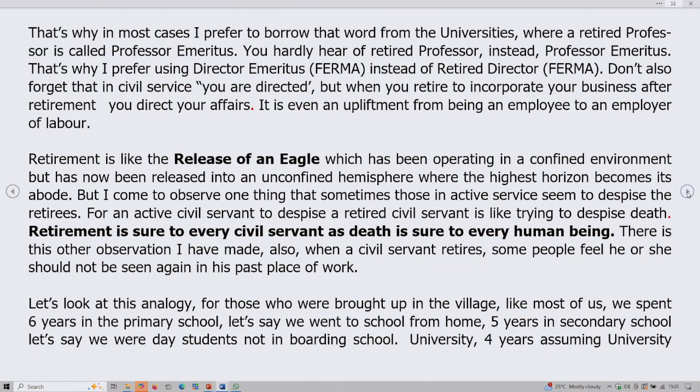The other observation I've made is that when a civil servant retires, some people feel he or she should not be seen again in his place of work. Let's look at this analogy. For those who were brought up in the village, just like me, we spent 6 years in primary school, spent another 5 years in secondary school. Let's say you had a university in your own town, 4 years.

That is, it means that you spent a maximum of 15 years in the village. In the civil service, we spent 35 years, like I spent, in our places of work. I therefore conclude, if somebody cannot stop me from going to my village, where I spent only 15 years, when I retired, nobody should stop me from going to my place of work, unless such a person was not treating his subordinates fairly.

Let me also sound a note of warning here. Never retire to the village if, when in service, you were not close to those in the village. The result will be that of living in seclusion, loneliness, social alienation. And these are the root causes of depression and terminal disease, leading to early death of most retirees. Does it make sense?

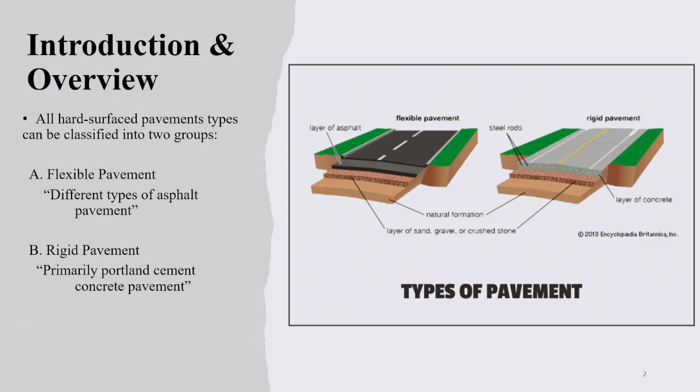So as we all know, our pavement is either flexible or rigid. Flexible is more or less asphalt concrete, binder or bituminous material, and rigid primarily is Portland cement. Now we are using RCC. And I'm not sure if you have heard about what the Italians are trying to do. It's good to mention, since we're talking about new materials, they're doing what they call self-cleaning roads.

Self-cleaning or photocatalytic roads. Basically, some materials have the tendency to eat up dirt; it decomposes dirt in the presence of sunlight. We all studied in primary school that there is photosynthesis, like green chlorophyll. When you give carbon dioxide and sun rays, you have oxygen. So there are some materials that do the same, but instead of changing carbon dioxide to oxygen, they eat up the dirt.

I mean, it's the dominant cement company on earth. It's Italcementi. It's Italia, like Italy, Cementi, like cement. So they already have prepackaged Portland cement with incorporated photocatalytic components. There are lots. I personally did some research using titanium dioxide, micro to nano size. Nano will be expensive, but on a practical level, micro titanium is not that expensive at all. And if you incorporate it in rigid pavement, especially on the top 1 inch, that's more than enough.

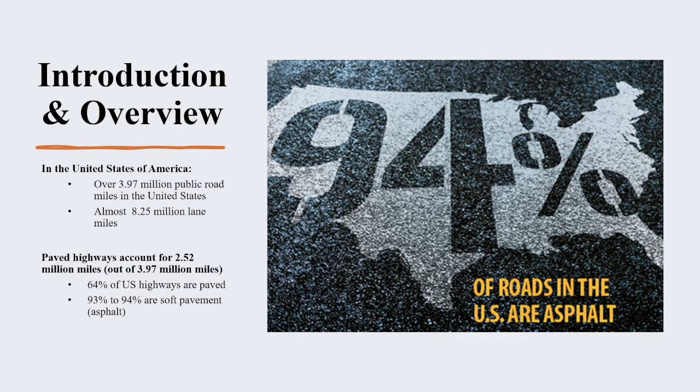Okay? So close to 4 million public road miles, or 8.25 million lane miles in the US. The paved accounts for 64%, and out of the 64%, 93 to 94, I think this is about a year or two ago. Now we're talking 92 to 93. I think 93 is a more fair number, are soft pavement or asphalt. That includes all the types. Hot mix, well, I wouldn't say cold mix, but warm mix and hot mix.

We've seen there is dense graded, there is open graded or gap graded, there is porous. It depends on the function. Do you need it mainly for drainage? Do you need it mainly for fighting ruts, etc.? But hot mix and warm mix together add up to 93. Rigid pavement, including Portland cement plus RCC,

is accounting for about 7%. The self-cleaning came to the US; they used it in one state, the state of Missouri, and it's like a pilot project, so it does not represent any percentage. It's just more under exploration right now. But who knows, maybe in 5 years, the pace is getting so fast, it becomes the norm in rigid pavement as well.

Driving, 3.2 trillion miles. The amount of losses is 130 billion dollars. Again, why these losses? When you remember the life cycle cost, the cost at any point is not only the cost of construction, not only the cost of equipment, not only the cost of material. You have to consider the user's cost, the commuter's cost.

This cost includes the regular expenditure, gas, oil change, regular maintenance, or it could be the cost when you have a detour or a blockage or capacity restriction: a 4-lane road, you cut it down to 2 and you are maintaining 2, then that congestion results in more gas consumption, time loss, and time equals money. So all this has to be accounted for.

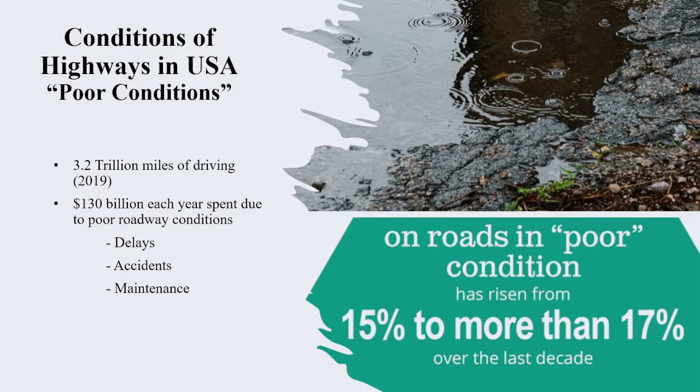Also the accidents evolving from poor conditions, especially ruts mainly. I wouldn't say a regular crack or raveling would do, but accidents account whether you have a mechanical problem or damage to the equipment, which is your vehicle, or human injury, that's another cost, or death, God forbid, which is the maximum cost incurred.

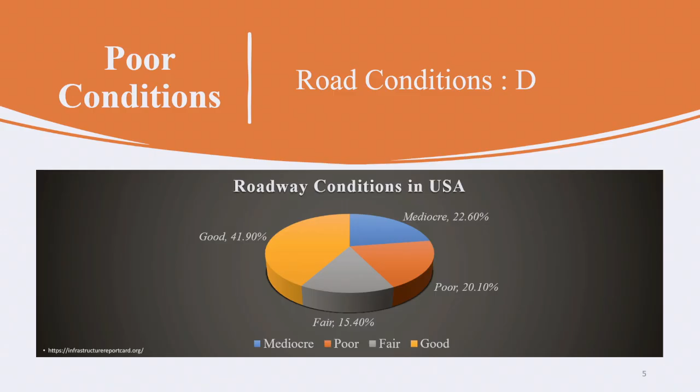I mentioned this before, and this is a better looking pie chart. Only 42% looks good; 58% are not in good condition. Remember, our overall grade is a D. If you go to the first presentation, D means it's failing or about failing. So it's really in poor condition. C is mediocre. F is clearly failing, that needs a full or new project. It's not worth maintaining, just replace. So it is disastrous. The amount of money available is covering only 60% of the needs.

Another thing for the quality of the highways is the smoothness. If you remember the drainage, if you calculate the drainage, is anybody interested in hydraulics? So what's the Manning coefficient? Or what's the flow rate?

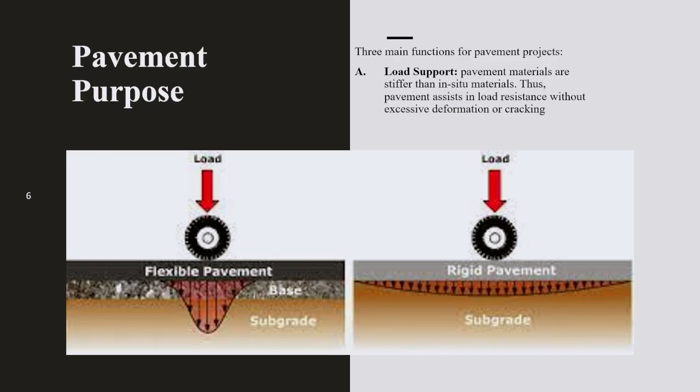So from that point, they developed the reverse or the inverted. I think the terminology they used is inverted. I have to check it. It's kind of new, but I have how the section goes. So basically what they are doing is strengthening that base course, making it much stronger than the surface. Sometimes they add binder to this, believe it or not, mix it like FDR. But most of the time they do strong stabilization. And soil stabilization depends on the nature of the soil. If you have soil that tends to be sandy, what do you think you're going to do? They do cement-based stabilization. If it is silt and clay, they do lime stabilization.

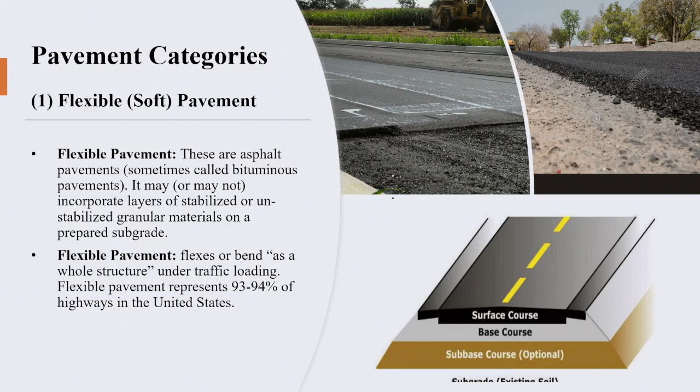So you end up with your base course almost like a beam, as if you are having a layer of semi-rigid pavement, but it's not rigid. And on top of it is your flexible pavement. This way, when the load is transferred, this bottom one is super strong, so you're not afraid of the rutting. And the top one has the ability to, yes, flex. So this is one of the developments on the asphalt they are doing.

Now, categories for rigid. I know you're not using it. I think the future will include it; it's a newer trend. Like in Egypt, 10, 15 years ago, when my dad was alive and he was undersecretary in the Ministry of Transport and Ministry of Housing, if you told him concrete pavement, it was like 1 in 1,000.

Right now we're talking about 3-4% in Egypt, and it's going up. There is the new capital built on the desert. There are a lot of these types of roads by the pyramids, between the pyramids and the Grand Egyptian Museum. If anyone is following the news, they're having what they call a tourism corridor or something like this, where they will have electric cars to take you between the pyramids and the new museum. It's about a 1.5 mile drive, and then there will be cable cars and electric cars. Anyway, it will be open sometime at the end of this year.

So they had concrete there because, based on UNESCO, UNICEF, and some organizations, they wanted that area to not have a lot of dark colors, to look natural, close to the desert, and with little pollution. So they found concrete to be a better option. So rigid pavement, again, remember, it's PCC or RCC. PCC is Portland cement concrete, and RCC is roller compacted concrete.

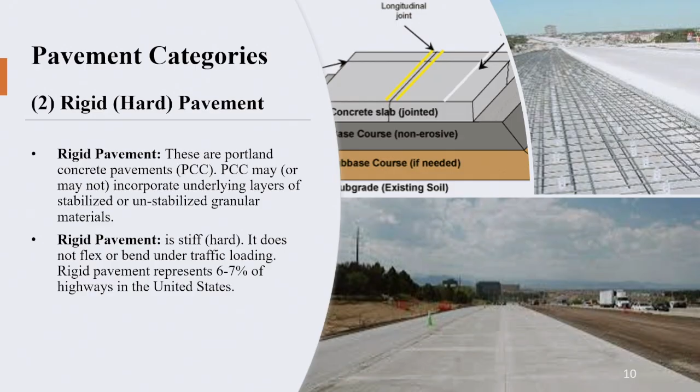The normal Portland cement concrete, we use it, as I said, almost 7%, whether you use it as continuous or jointed or reinforced or non-reinforced. You can have multiple combinations: reinforcement and joints, reinforcement and no joints, plain and joints, plain and no joints, but this is very rare because if there are no joints, you need reinforcement to manage the cracking because of expansion and contraction. And then there is some pre-stressing, but I really don't see it much, where you use precast, pre-stressed slabs.

Now to RCC, and I need you to pay some attention. I know it's hard because it's the end of the day, but it is the new kid on the block right now. It is being used extensively in applications where you are afraid of rutting, or where you basically want to cut down rebars, or where you have extensive loading or impacts, like airports. Harbors where you have lots of freight and containers and heavy loading, or heavy industrial parks, and some highways for sure.

So RCC, in general, it's concrete at the end of the day. We know what concrete is made of. You have some voids, some water mixed with cement that gives you the binder, plus a content of aggregate to fill the voids on an economic basis. Aggregate, some of it is coarse, some of it is fine. So water and cement give the strength, aggregates coarse and fine as a filler, and some voids, right? This is regular concrete. Same. Nothing is different. Contents are the same.

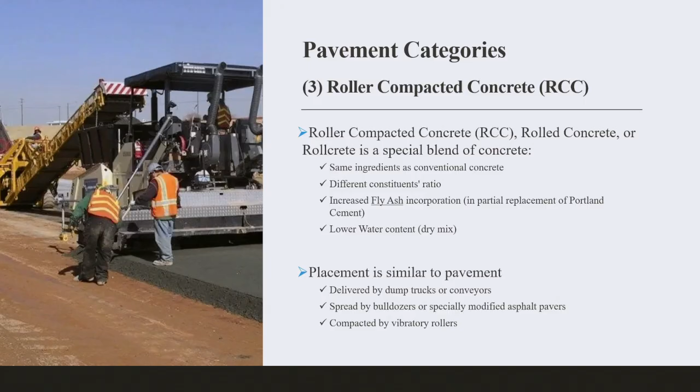Proportions are different. And when you do the placement, it is not like concrete. You don't shoot it or pump it. You place it. I'll show a video, hopefully it works, at the very last slide, a few-minute video talking about how to manufacture it, the advantages, the disadvantages. Very nice video. So what is the difference in constituents?

Whoops, what is this? Okay, I'll talk about RCC. My line of thinking got a little bit faster. So RCC, I'll have a nice presentation, nice slides at the end, after I talk about the flexible. So sorry, I got distracted for a second.

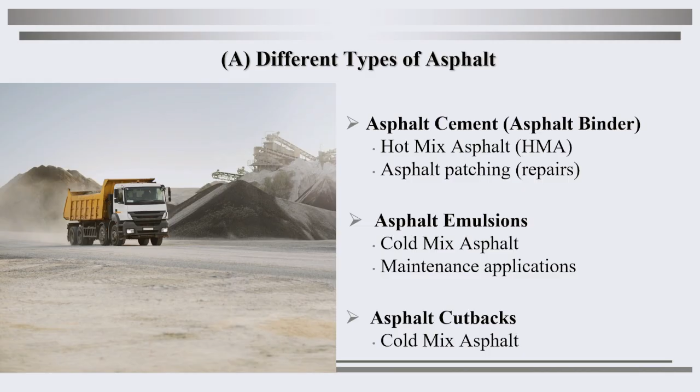So, there are asphalts, like the asphalt cement, or the cutbacks or emulsions. These are all natural, and then there is the tar. Now, asphalt cement or binder, we have, as I mentioned, HMA and the patching. We have cold mix, which is only for maintenance. We have warm mix as well. If you talk about tar, I don't think you use tar in Nigeria, right? You do? It's on the decline in the US. Everything is petroleum based.

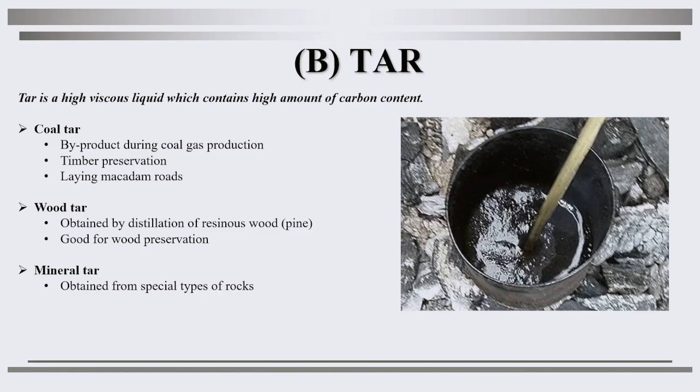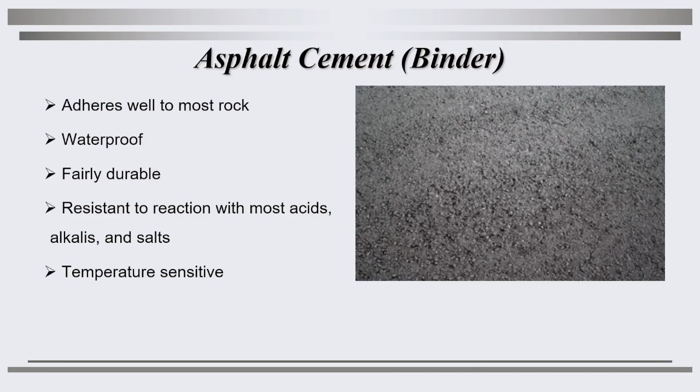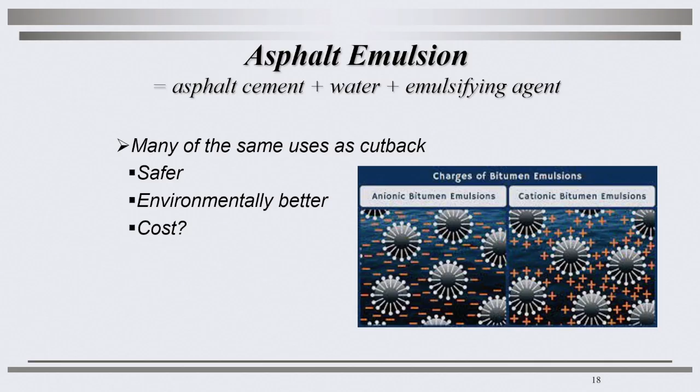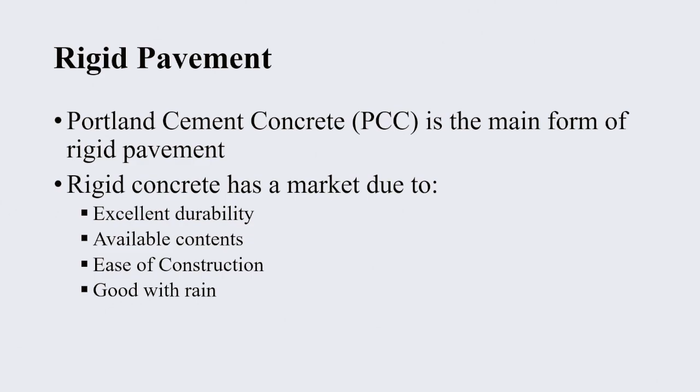Now, coming to the rigid pavement, that's where I was mostly focused. This is a similar type of section: sub-base, base, and concrete pavement. And rigid pavement, as I said, is used because of the durability, availability of contents, and ease of construction. It's very good with rain. Rigid pavement, these are the options for it. The JPCP, plain and jointed. Plain means no rebars, and jointed with joints.

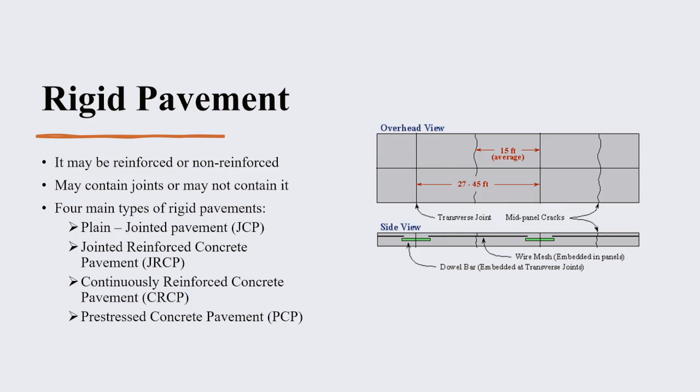Jointed reinforced, so you have rebars. Continuously reinforced, so no joints, but you have reinforcement just to take care of expansion and contraction, so cracking because of climate change. Then PCP, the pre-stressed, I honestly haven't seen it. Now, some attention here, please. The rigid pavement and the roller compacted concrete, this is exactly as you see it. Can you tell me some differences here?

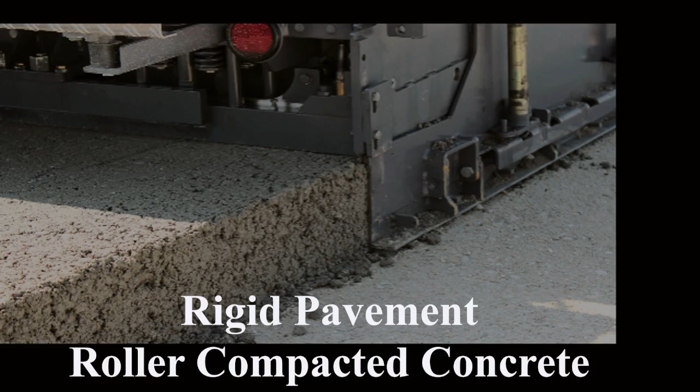So you cannot have a very fair surface like PCC per se, because it's very rigid. Even if you roll it, we'll see how it rolls. You place it by pavers, asphalt paver. You do very heavy surfacing, but still it will end up rough. So

The funny thing, the US Corps of Engineers, the one that does all the construction for the Army, they call it negative slump concrete. I've done a few projects with the US Army, even before immigrating. I was graduating during the second Gulf War, Iraq and Kuwait, and the American Army was there in the area, so they used Egyptian companies, joint venture with US companies, to make all the construction in the Gulf, residential, airports. So I was one of those engineers deployed to help them. So they called it negative slump. It's like, what negative? You put it, it goes up? No, it's a term for zero slump concrete.

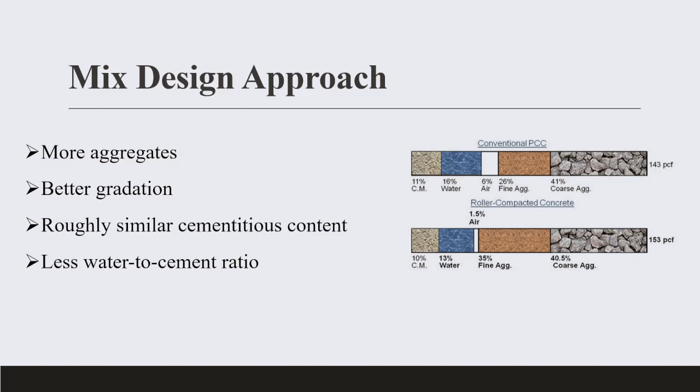So the mix design approach is a volumetric method like ACI. You have a phase diagram, you add all the constituents or the ingredients to a 1 unit volume, 1 cubic yard in the US, 1 cubic meter here. However, the approach in proportioning the constituents is different. Does this remind you of something that Dr. Patrick was talking about yesterday? The 0.45 power chart. It is actually a chart developed by the FHWA, Federal Highway Administration.

The whole story behind this is, if you do a regular sieve analysis, you can tell what gradation you would have for the as-is aggregates or as-is soil, right? You can tell the percentage of coarse, the percentage of fine, the percentage of every size within the coarse, stuff like that. But if I give you 3-4 different aggregates with 3-4 different gradations and 3-4 nominal maximum sizes, and I told you I need you to combine them together, what proportion would you take from every one so that the overall mix of the aggregates would have the least amount of voids? Is this question clear?

So basically, you have aggregate A, aggregate B, aggregate C, aggregate D. All of them are different in nominal maximum size, the least sieve size that passes 85 or 90% plus. That is what Dr. Patrick said yesterday, and that's 100% true. In the US, sometimes we say 85% passes makes it the nominal maximum size. But anyway, this nominal maximum size and this gradation are different for the 4.

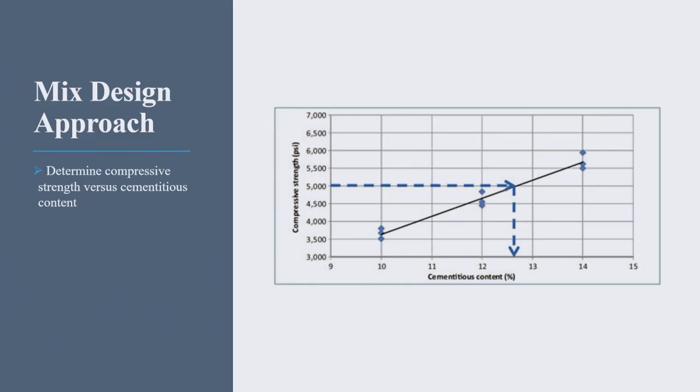So you do multiple cylinders or multiple cubes with different cement content, which would result in different water content, and the aggregate you proportioned, and you break. Now you know exactly what the strength is, so this is trial and error. You draw the chart, that's regression, right? Then you come in with the strength horizontally, you hit it, you go down, and that tells you exactly the cement content. Knowing the water cement ratio and the cement content, you can get the water content. Calculating the water volume and the cement volume, you will know the aggregate volume, and through the aggregate percentages you get quantities, then you work it backward, and here you go.

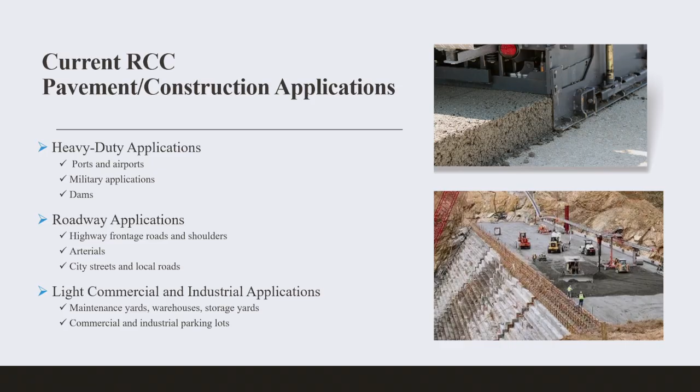Advantage-wise, and I promise I'm going to be almost done. Heavy-duty applications love RCC. Talking about ports, airports, talking about military. The military is high. That's why the U.S. Corps are standardizing this in a lot of projects. Dams, because you need it watertight if you do a concrete dam. Roadway applications, it is there. Even in arterials, city streets. Then in light commercial and industrial, it is also there.

Now, to be fair, yeah, these are the advantages. It gives you faster pavement because once you place, you roll with pavers. You don't need any forms. You don't need reinforcement. The reason for no reinforcement is the higher percentage of fine aggregate. Usually the expansion and contraction happens because of coarse, not fine aggregate. So if you lower the percentage of coarse aggregate and lower the size of the coarse aggregate to improve the packing order, then there is no need for reinforcement. Why would I waste time and money, right?

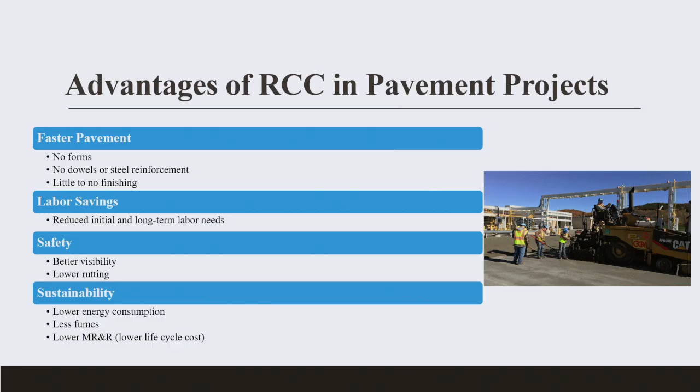Finishing is little, with the exception of surface grinding, labor saving, you're using machinery. It's safe because while pouring you have better visibility, you have fewer fumes and vapors, not like hot mix asphalt at 150 degrees. Very sustainable, low energy consumption. Just to be fair, I have to mention some of the impediments, because sometimes it's too good to be true. Think about the surface. As I said, it's a rough surface, so you have to do surface grinding.

A lot of truck mixers, I mentioned this either yesterday or the day before, because of zero slump, if you fill the truck like you do with regular PCC, by the time you start pouring it, it will already harden on the mixer. So you have to use a very little amount, half or even 1/3 of what you do with regular PCC. That makes you use more trucks, which increases the cost.

Edges sometimes are hard to compact. You have to have rapid placement because of very fast setting. It's already dry. So if you are pouring a long segment and you delay the pour, you'll easily have a cold joint, which is usually a weak point. Hot weather like here could probably be hard.

I mean, we faced during my father's time the same hardship building the High Dam in Egypt during President Gamal Abdel Nasser's time. So of the amount of water, they used to weigh ice. So half the water was ice by weight. They place it with the mix. Or you can use plasticizers, but that will shoot the cost high, which is the last point.

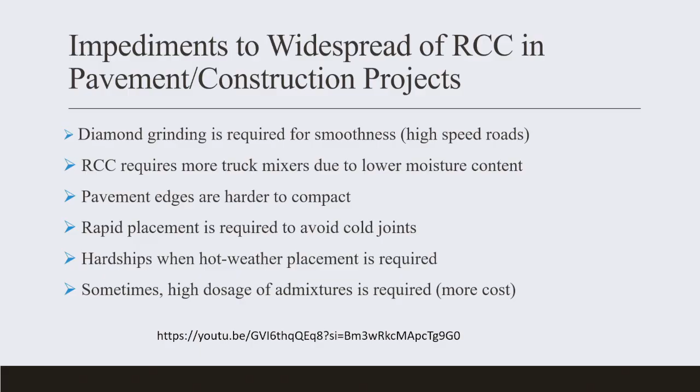Just to conclude, there is a few minutes video. I'm not sure why the link is not popping, but guys, at the end, you have an internet connection. If you can cut and paste this link at the very bottom of the slide and put it on Google search or whatever, that will pop up a few minutes video. It's a very, very informative video about roller compacted concrete.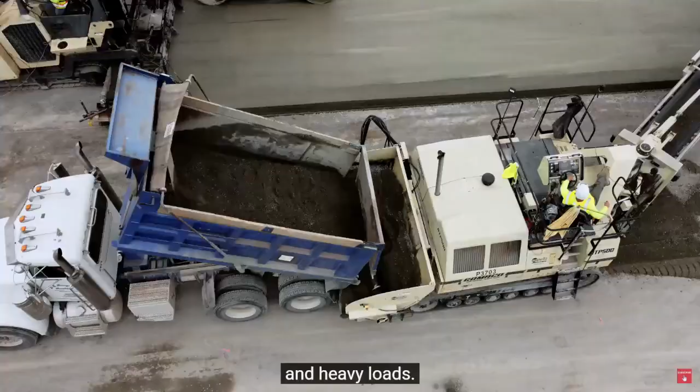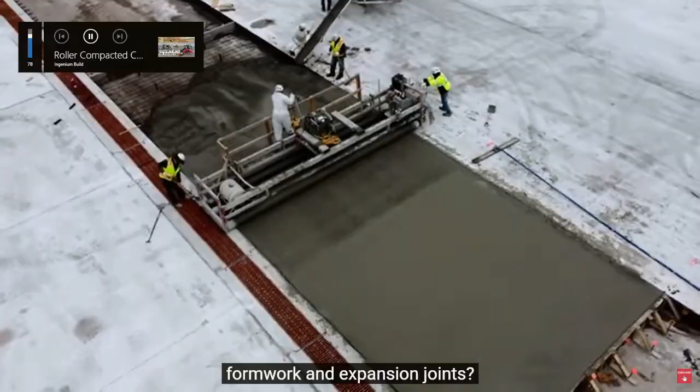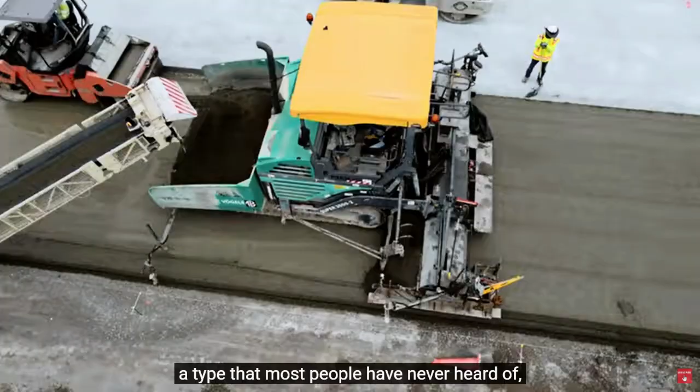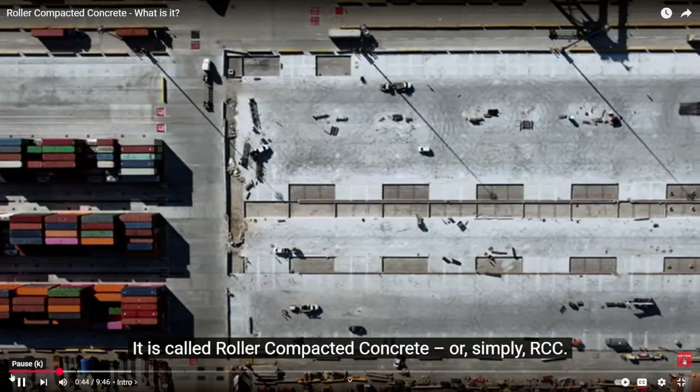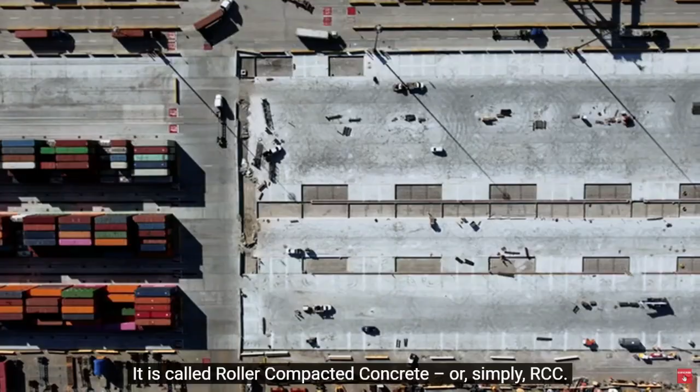Today, we will talk about a very special type of concrete, a type that most people never heard of. Concrete that does not look like traditional concrete, and that is not even placed like traditional concrete. Yet, it is much more durable and robust than traditional concrete. It is called roller compacted concrete, or simply RCC. Today, I will explain to you what RCC is, how it differs from traditional concrete, and we will look at the placement process and its history.

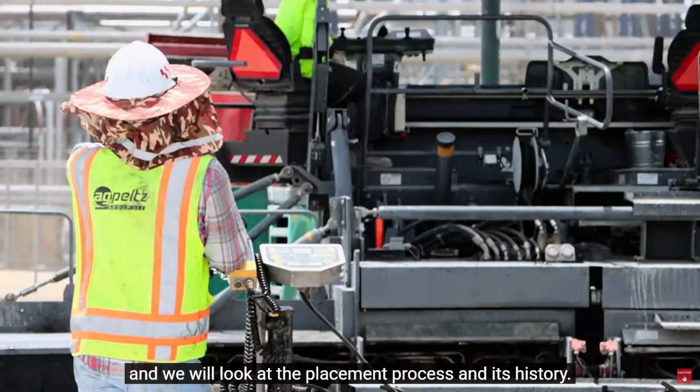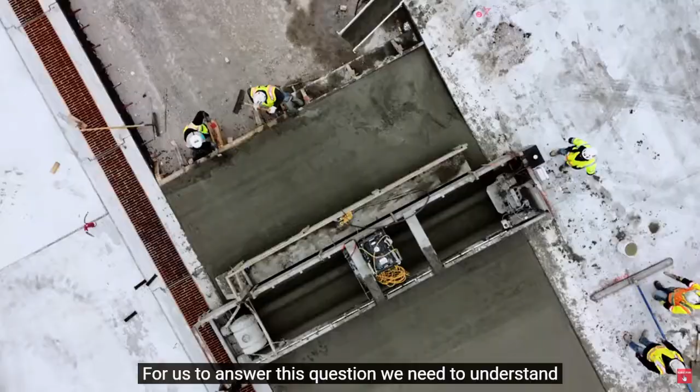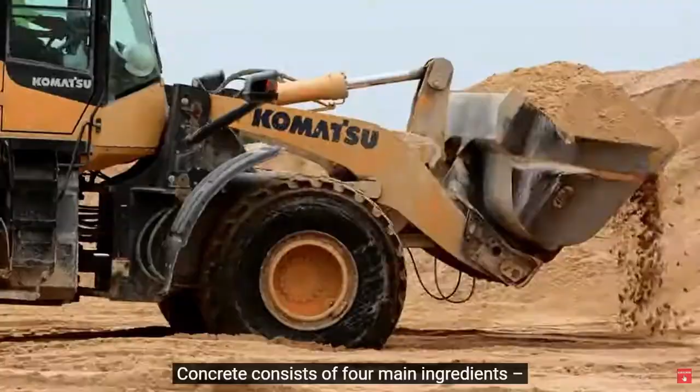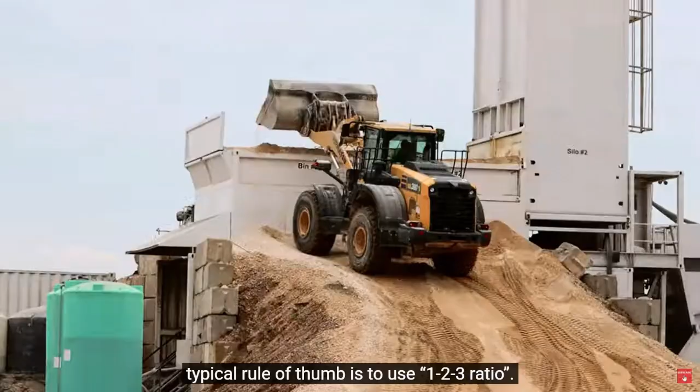So, what is roller compacted concrete, and why is it so different from traditional concrete? For us to answer this question, we need to understand what the fundamental difference between traditional concrete and RCC is. Let us look at how traditional concrete is mixed. Concrete consists of four main ingredients: water, cement, sand, and rock, which are called fine and coarse aggregates. To get a concrete, those four ingredients are mixed in proportions. Typical rule of thumb is to use 1-2-3 ratio, which means for 1 unit of cement, 2 units of sand and 3 units of rock are added.

Water is added into the mix by eye judging to get a desired consistency. Within the industry, things are not that simple, and concrete mixes are designed by the engineers. Batch plants very carefully measure and weigh each component, including water, prior to mixing. However, at the end of the day, it does not change the outcome. As a final product, concrete looks like jelly and flows very well.

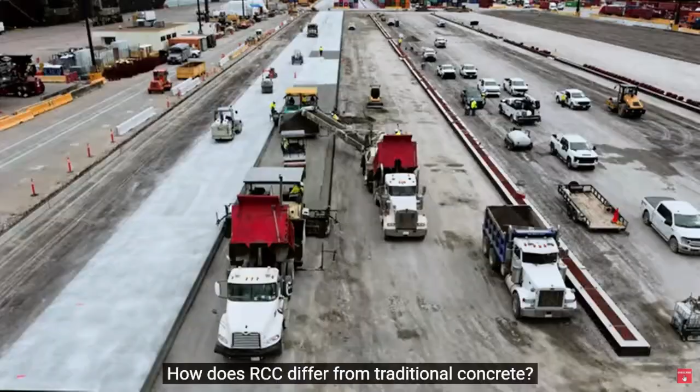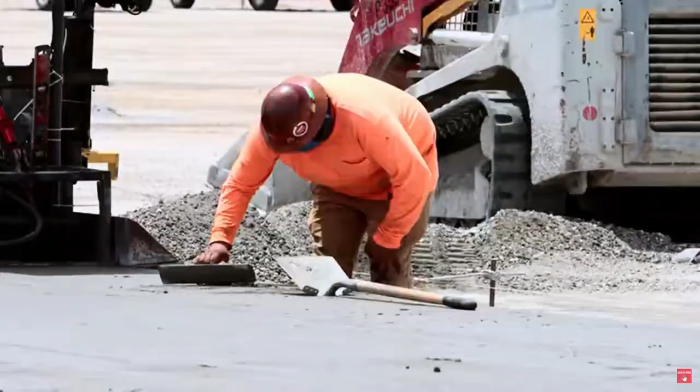How does RCC differ from traditional concrete? RCC has two significant differences from concrete. First, there are no large rocks in the mix. Rocks are added to the mix. However, pieces of rocks that are used are relatively fine. The second difference is water.

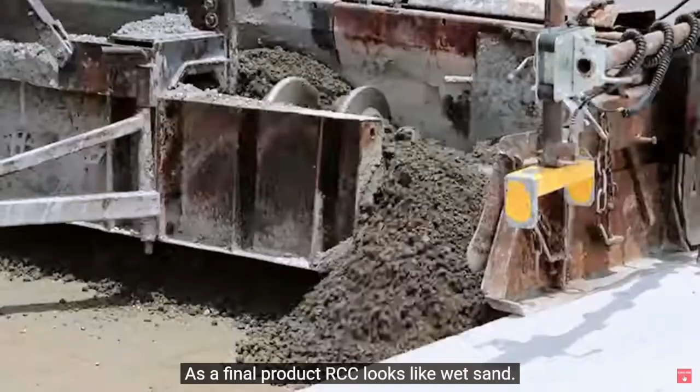RCC has almost no water in the mix, and the final mix has no viscosity, which means concrete does not flow at all. As a final product, RCC looks like wet sand. Such a different consistency of RCC material requires a completely different placement method.

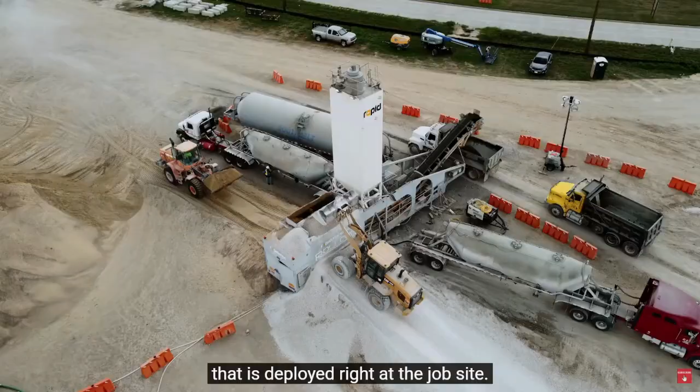Roller compacted concrete is mixed by a mobile plant that is deployed right at the job site. Since RCC has no slump, it is not transported in traditional concrete mixers. Instead, RCC is transported in dump trucks. Placement of RCC is usually done in two layers, which are called bottom and top lift.

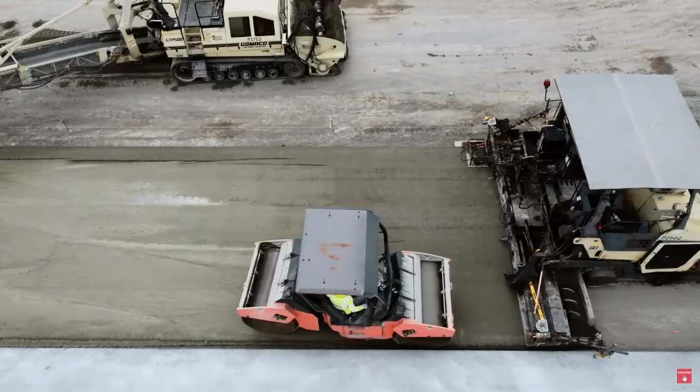Lifts are placed by pavers that look like typical asphalt pavers. This whole process sort of looks like asphalt placement, however those pavers are not that simple. Pavers are equipped with special tampers that compact RCC to at least 90% of its density right at the placement. The leading paver places the bottom layer of the RCC. The paver receives concrete directly from dump trucks that dump RCC into the paver's hopper.

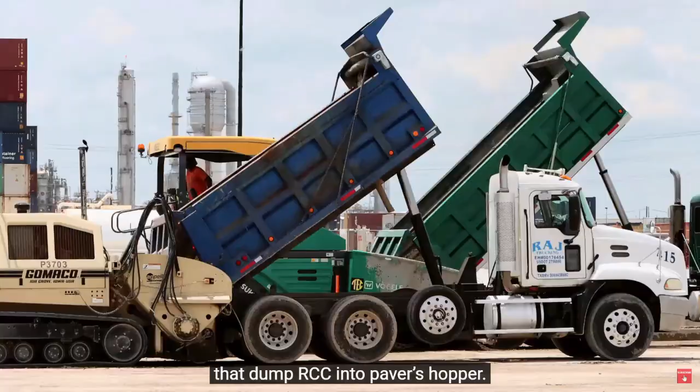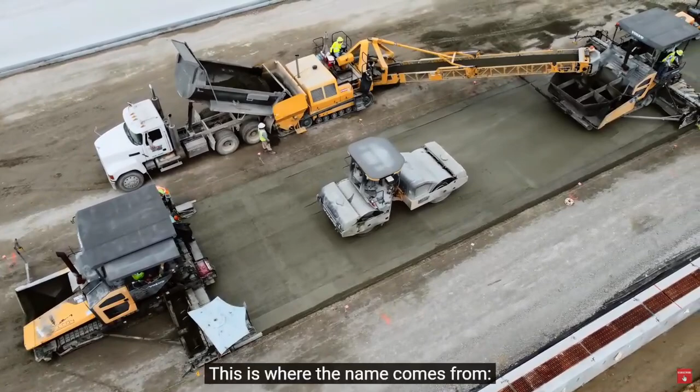A heavy roller follows the leading paver. Its purpose is to further compact RCC to 100% of its density. This is where the name comes from. As concrete is placed, it is compacted by rollers, so it is called roller compacted concrete. The second paver follows about 100 feet behind and places the second lift on top of the first lift.

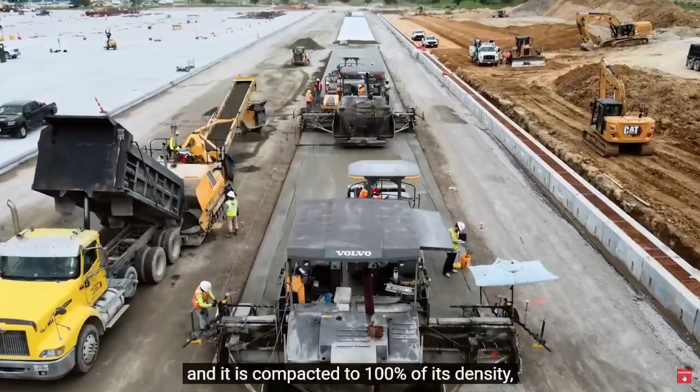Since RCC has no slump and it is compacted to 100% of its density, equipment can walk on RCC's surface right after placement with no issues, unlike traditional concrete that stays liquid and then soft for an extended duration of time. The second paver cannot receive concrete from dump trucks since it is blocked by the leading paver, so instead RCC is moved into its hopper by a conveyor. The entire paving train slowly moves together as RCC is being placed. If RCC is placed in one lift, it just makes the operation much simpler.

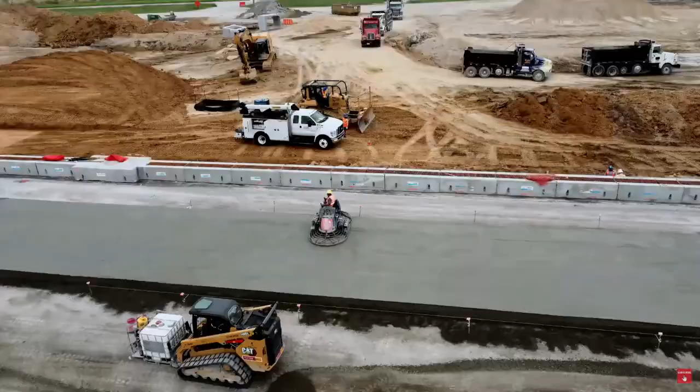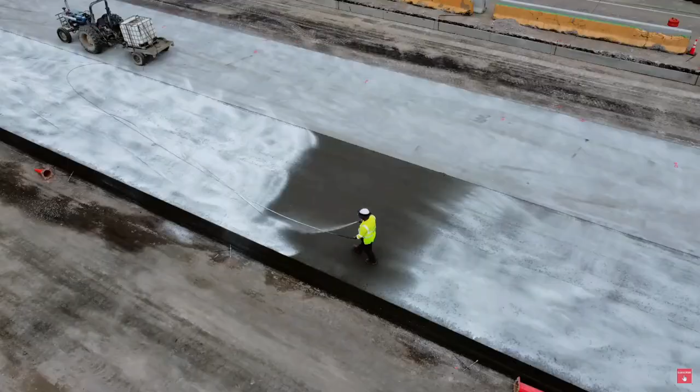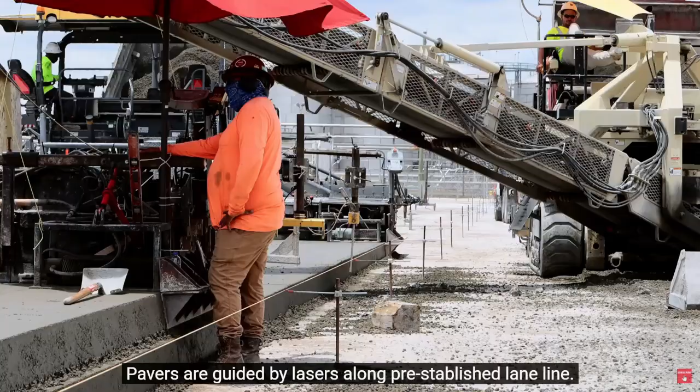In some cases, when the finish needs to be smooth, a troweler can be utilized, but it does not happen often. Finally, a bobcat usually runs around, picking up RCC that was dropped by trucks or the conveyor feeder. Curing compound is sprayed on the surface of the top lift after the roller finishes compaction. It prevents evaporation of water from concrete. Pavers are guided by lasers along a pre-established lane line. Placed material is frequently tested to verify its density and moisture content.

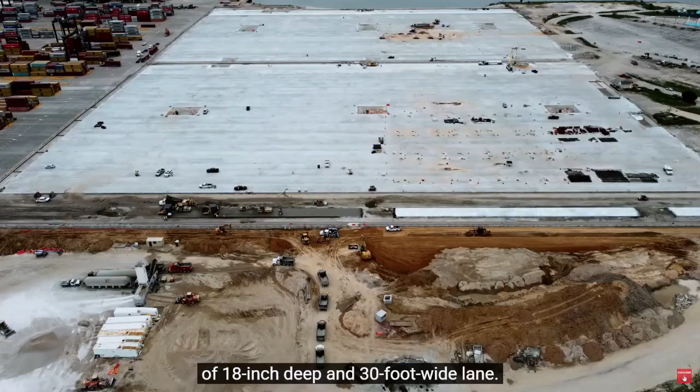The RCC paving process is extremely quick and efficient. In one day, pavers can easily place 1200 feet of 18-inch deep and 30-foot wide lane, which is an insane production rate. Even though RCC can withstand significant loads, it does require extensive preparation of the subgrade. However, it is fair to note that subgrade preparation is the same for both RCC and traditional heavy-duty concrete. The bottom line is simple: subgrade needs to be able to carry the design load, and it doesn't matter what concrete is used on top of it.

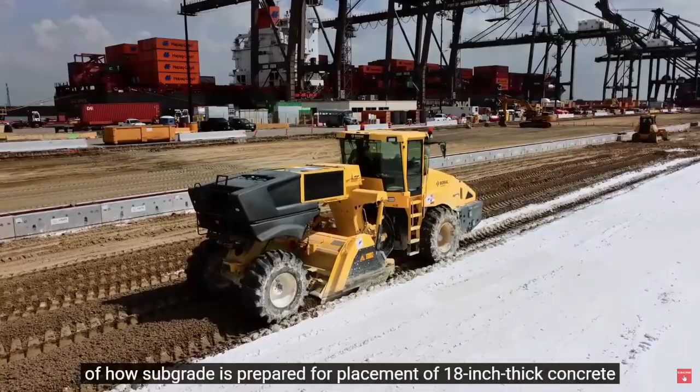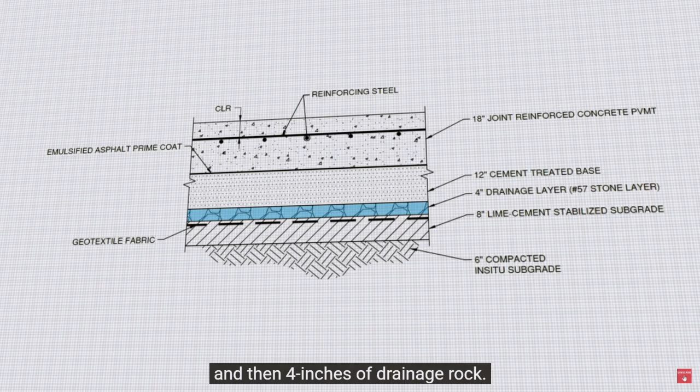Let us quickly look at the cross-sectional drawing of the subgrade. At the very bottom we have 8 inches of lime cement treated soil. On top of it we have a geotextile layer, and then 4 inches of drainage. Next is 12 inches of cement treated base, followed by a bond breaker, and 18 inches of concrete, which is placed in 2 layers of 9 inches. These are recommendations, but you can do it without geotextile.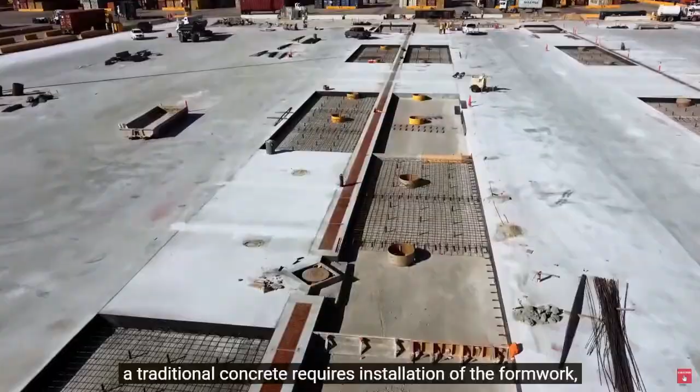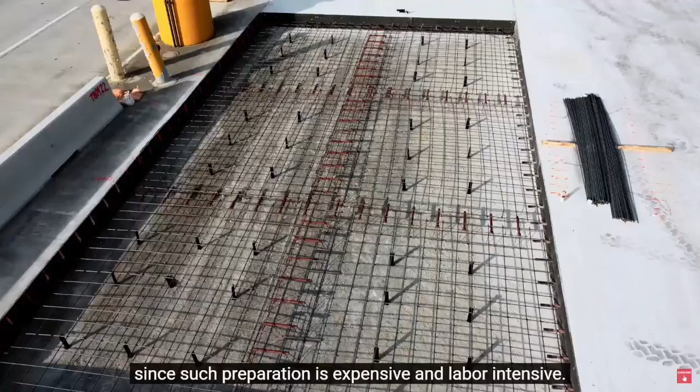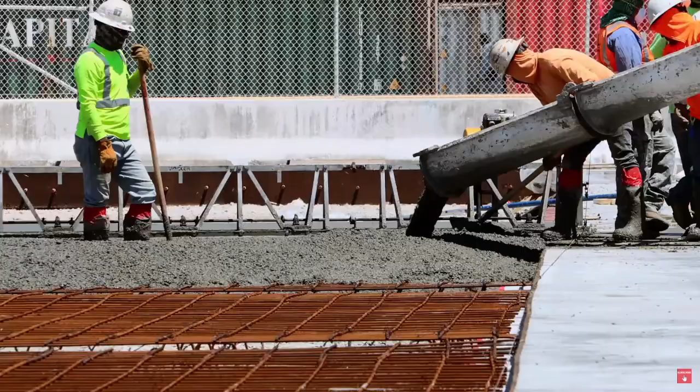As subgrade is prepared, traditional concrete requires installation of the formwork, reinforcement and joints, none of which are required for RCC. This is a huge game changer, since such preparation is expensive and labor-intensive. Cutting formwork, reinforcement and joints out of the equation saves a huge amount of budget and significantly increases placement rate. So why is all that unnecessary for RCC? The main objective of the formwork is to keep concrete from flowing away, since its natural form is jelly and it flows well. As we know, RCC has no slump. As a result, formwork is not needed.

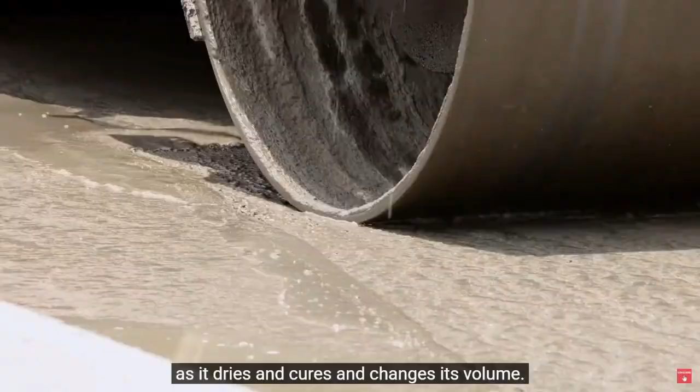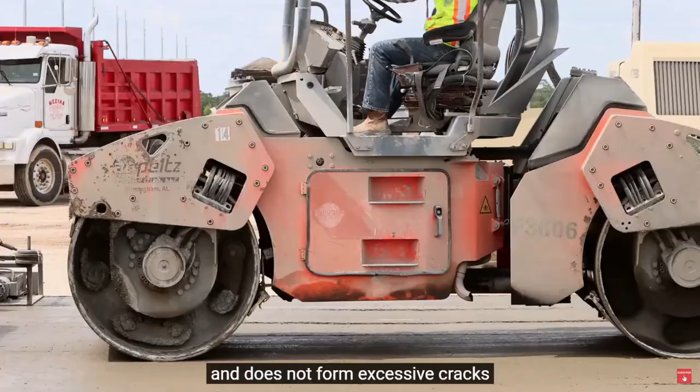The main objective of reinforcement in pavement is to control cracks. Cracks appear in concrete during its shrinkage, as it dries and cures and changes its volume. But RCC is compacted to 100% of its density and has very low water content. So it does not really shrink and does not form excessive cracks. Hence, unlike traditional concrete, reinforcement is not needed. It would be fair to note that RCC does form minor cracks, but those cracks do not present any danger to its integrity.

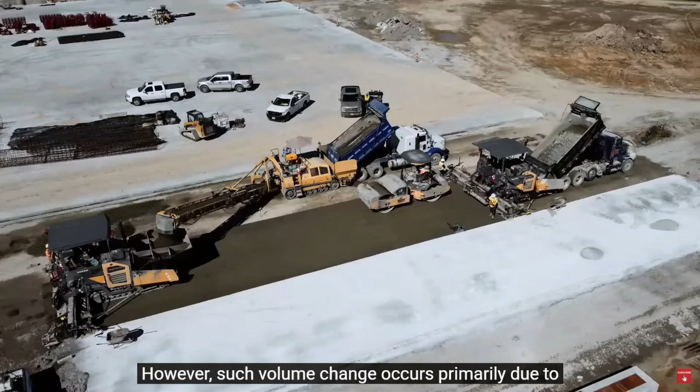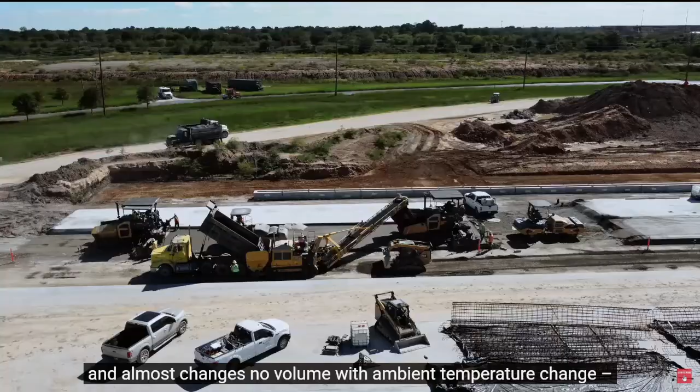The main objective of the expansion joints is to allow concrete to move as it changes its volume during ambient temperature change. However, such volume change occurs primarily due to the rock that changes its volume in the body of the concrete. RCC does not have large rocks in its body and almost changes no volume with ambient temperature change, so expansion joints are not needed for RCC.

Besides those benefits, RCC also offers several other benefits. Very high compressive strength, excellent load transfer over cracks or cold joint lines, almost immediate readiness for the traffic, and finally, RCC performs extremely well under freezing conditions. So where does RCC come from?

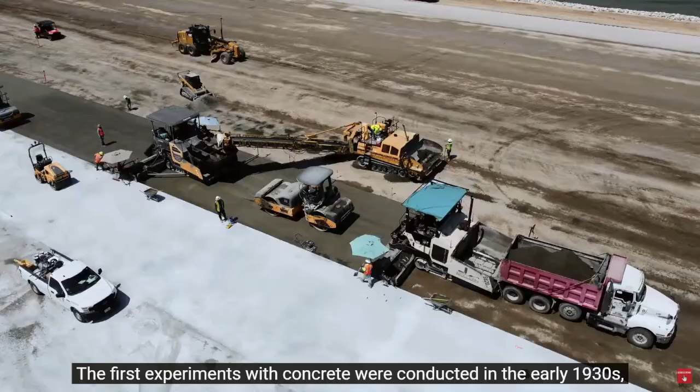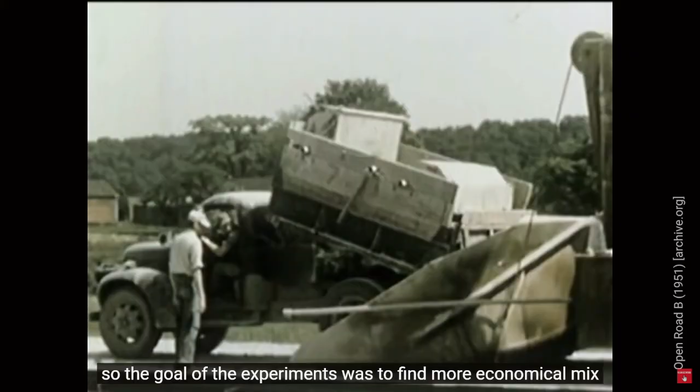The first experiments with concrete were conducted in the early 1930s, when engineers started utilizing concrete for pavement and roadway construction. At that time, pavement operations with concrete were expensive and time-consuming, so the goal of the experiments was to find more economical mix and to decrease placement time. But there is not much information about early research, and applications of the RCC were very scattered.

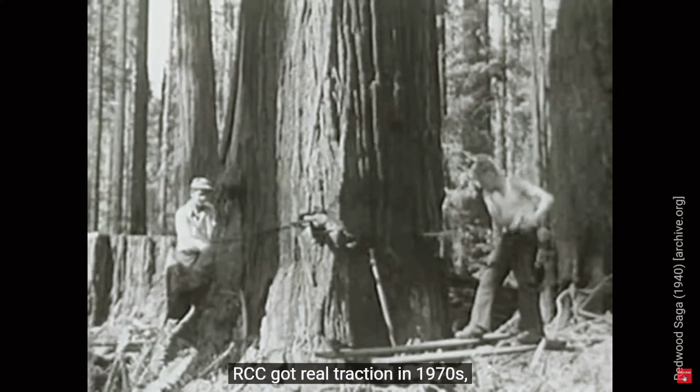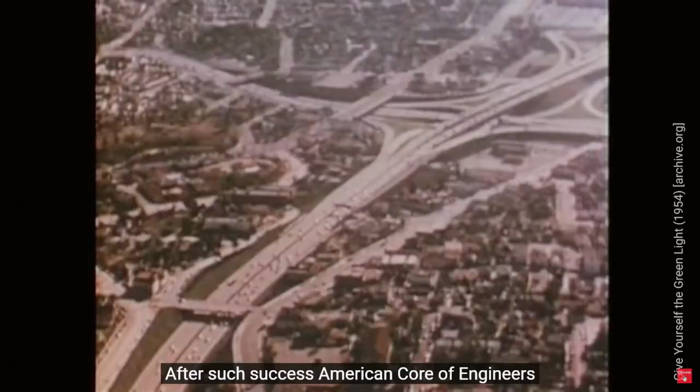RCC got real traction in the 1970s, when Canadian logging companies started widely utilizing RCC to pave their laydown areas, where logs were stored. RCC turned out to be much cheaper, ignorant to frost conditions, and extremely fast in placement. After such success, the American Corps of Engineers started its own research of relatively new technology, and conducted experiments and studies in the 1980s and 1990s. Corps of Engineers is the Army engineers. They use the word Corps of Engineers.

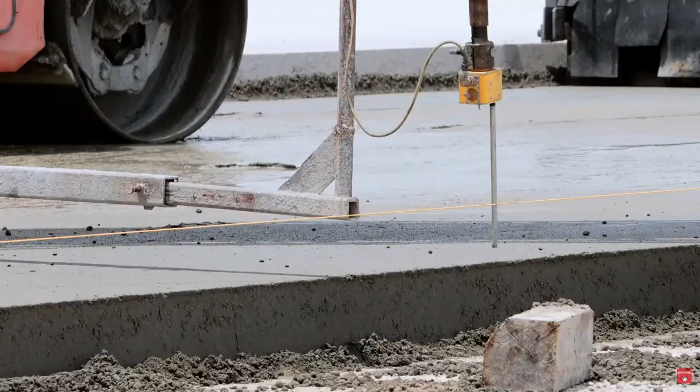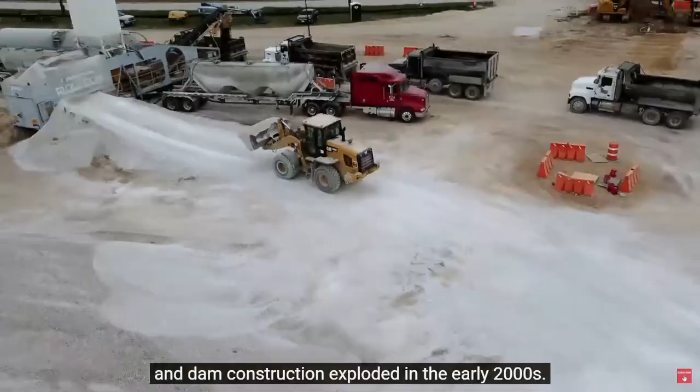In the early 2000s, RCC applications and usage started growing drastically, and today it is a very common go-to material for heavy-duty applications, such as container yards, busy highways, airport runways, and storage areas. Another side application that was found for RCC is dam construction. There are quite a few dams all around the world that are being built with RCC, and dam construction exploded in the early 2000s. New RCC dams are being constructed all over the world.

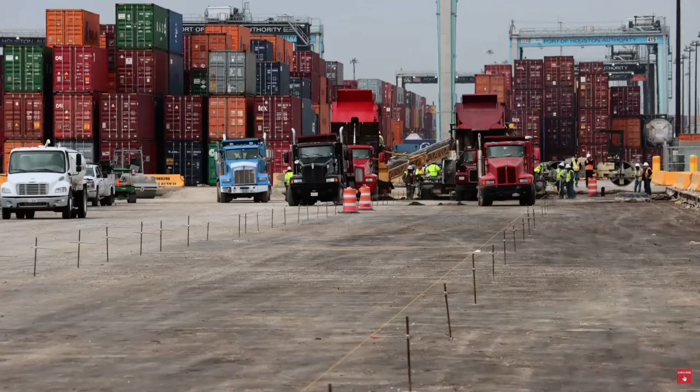So one thing I need to mention before we end this presentation, that contractors hate RCC because they lose their equipment much faster. You know, it's a heavy material, so once you use your roller, it really depreciates fast. So if you get a pushback, it's all advantageous for us as highway engineers. It's advantageous for the country. It is advantageous for the long term. But some contractors tell you we're losing the equipment.

Also, it doesn't need a lot of maintenance, so they lose the money they will make out of maintenance down the road. So, you know, they don't want to sell you a very reliable product. I'm serious, that's how they look at it. It might make some of them out of business because, especially for those who are making a living out of the maintenance of the highways, it dramatically impacts their business.

My research, I mean, if you Google my name, you will find one of the publications. It's very recent, like last year. It is the specifications of RCC for the state of North Carolina. I developed it for the Department of Transportation through my research at the university. You'll find all the information, including the negative sides. I have to be honest in my research, put the plus and the minus. Regardless if they like it or don't like it, that's my duty as a researcher.